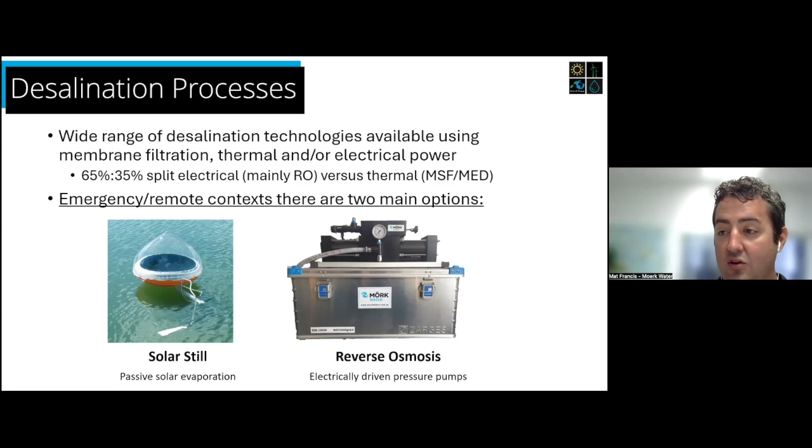When we look specifically at emergency or remote contexts, we generally see there are two main options. You've got a solar still, where essentially you put seawater into a plastic dome. The heat of the sun evaporates drinking water off the seawater, which condenses on the outside of the dome, and you can collect that to drink. And then there's reverse osmosis, which I will get into in more detail.

Reverse osmosis works as actually quite a simple process. In the forward osmosis process, you have clean water moving across the membrane into salty water - low salinity water moving across the membrane to high salinity water. This movement induces a pressure, a head of pressure as the water column rises. This is the osmotic pressure. If you reverse this process by overcoming that osmotic pressure, pushing down on the side of the salty water, you'll actually force clean water back through the membrane. That's all reverse osmosis is - providing a higher hydraulic pressure through electrical pumps to force water back across the membrane.

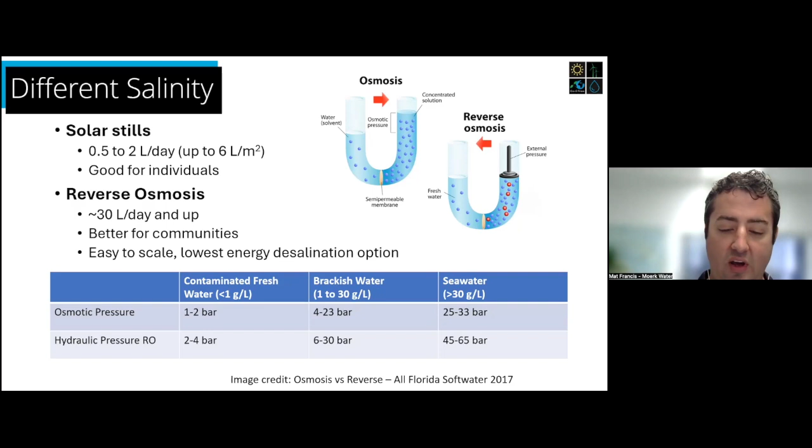When we're picking between solar stills or reverse osmosis, we generally see solar stills as very much a personal use device in emergency situations. These are a great thing to have on a boat in case your water maker breaks down. It's pretty much limited to about 2 litres a day, so it's just survival drinking water. You can make bigger systems, but you're always going to be limited to about 6 litres per metre squared of evaporation area. So these are good units for individuals, maybe for a house, not much bigger. Reverse osmosis systems can produce 5 litres a day, but generally when you're talking economical benefits, they're going to start at about 30 litres a day. So they're much better for a few households, up to communities, up to municipal scale. Generally when we're picking an option, it's going to start with how many people do we need to serve.

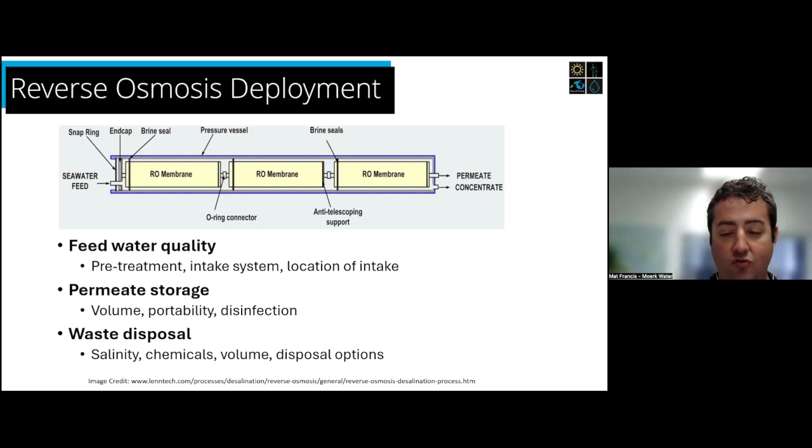Next I'm just going to quickly talk about the deployment of reverse osmosis, regardless of context - municipal plants, small remote plants, emergency plants. The process itself is fairly simple. We feed pressurized seawater across these membranes, and you produce 2 streams: your potable water and a waste stream. So the things you need to consider are: where are you getting your pressurized seawater from? Does it need pre-treatment? Where are you sucking it from? How are you getting that pressure involved? Then you've got to think of the 2 product streams - how are you storing your product? Are you going to then distribute it? Are you going to disinfect it? And for your waste stream, how are you going to get rid of this stream? Do you need to consider the salinity of the stream or the volume of the stream? So that's the process itself.

You also need to think of the supporting infrastructure around the reverse osmosis system. Reverse osmosis systems use a lot of energy - they are the most energy intensive of the water treatment methods that are commonly used. Generally for seawater reverse osmosis, you need between 3 and 5 kilowatt hours for every 1,000 litres you produce, which is a lot of energy compared to traditional water treatment methods. And the smaller scale these systems get, as you move towards emergency systems, you generally need more and more energy, because small high pressure pumps are not as efficient as big high pressure pumps. You've got to use more energy.

So that's just the power. You also need to consider your maintenance requirements - how are you going to maintain the system? And again, this is regardless of whether you're talking municipal, remote or emergency. How are you going to train your maintenance staff and operational staff to operate these units? Lastly, you need to consider how are you getting this unit to site, how are you installing it, and how are you going to house the unit. It's all fairly simple stuff.

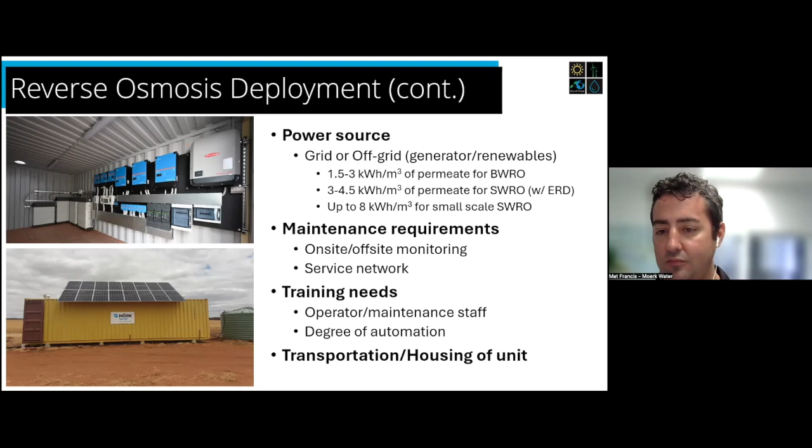When we look at the emergency context specifically, this does change slightly. For the feed water system, generally we're talking an ocean intake, seawater reverse osmosis. And you're going to have to be thinking, if it's in the wake of a natural disaster, you might have increased sediment load, increased bacterial load, you might also have fuel spills or something you need to consider on your pre-treatment system. Membranes are very sensitive, and you need to carefully consider what you're going to be putting across the membrane.

For the water you're going to produce, how are you going to distribute it? If it's an emergency situation, are people just going to be coming up with their containers to fill? Are you going to be putting it in temporary bladders, or are there storage tanks on site you can use? And then again, the reject - how are you going to be getting rid of this concentrate we're producing? Ocean discharge is generally best for seawater reverse osmosis, but there are salinity limits. This determines how much water you can pull out of the seawater you're treating, because if you pull too much water out, you're going to have a very salty waste stream you need to deal with, and that can cause real issues when you try to mix it back into the ocean.

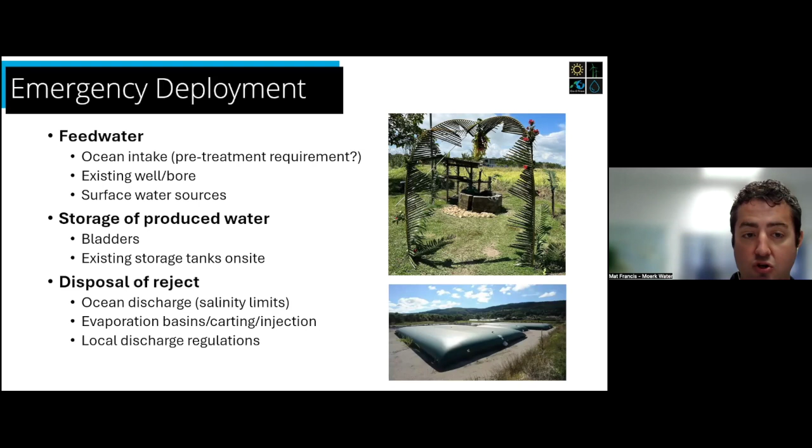In terms of power, for small portable emergency desalination systems, you can use renewables. For example, we have a 30 litre an hour emergency unit that requires 4 foldable solar panels - quite small, portable panels. As you get up in scale though, because of the power demand, you can't really use renewables to power these systems. So if your local grid's down, you're going to probably have to bring a generator on site with you to give you the power you need. Then you've got all the things around having to bring fuel with you, whether petrol or diesel, and supporting the infrastructure of that generator as well as the water treatment system.

If you're running these systems at high recovery, you're probably going to need some chemicals on site as well. So you have to make sure your dosing system's working fine and that you also have a source of that chemical. And then transportation - the more and more we add to these systems, so we've got a power system, chemicals, the water treatment system itself, all of that needs to be transported to site. Because if any one of those factors isn't transported to site, the system's not going to work.

And then around all of this is your operation and maintenance training. You're having to make sure that your operator knows what to do, how to make sure he or she is using the feed system correctly, producing the product water, producing the reject stream, and dealing with that correctly.

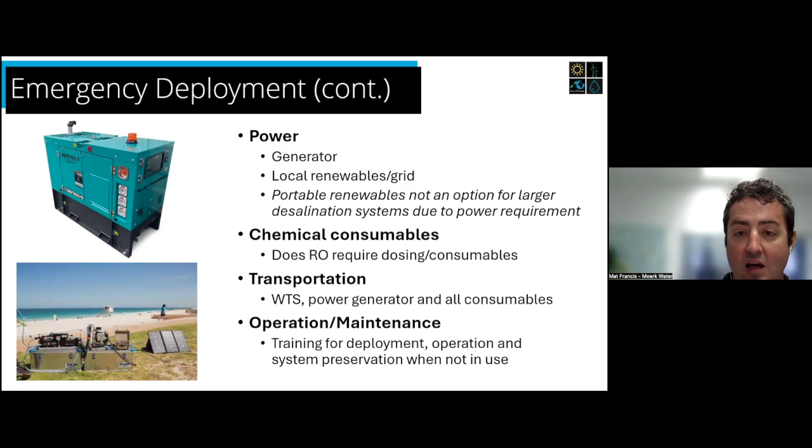And then we get to the big difference for emergency systems, which is storage. Emergency systems differ from remote or municipal systems in that they're not used all the time. Reverse osmosis systems love to be used day in, day out, and are really good for providing a base load supply of water. If you do need to pack down a reverse osmosis system, the best thing you can do is drain the entire system, pull the membrane out, and store it in a specialty chemical called sodium metabisulfite. Essentially you soak it in a 1% solution for an hour, drain it, and then seal it away from air. That should preserve that membrane for 3 months.

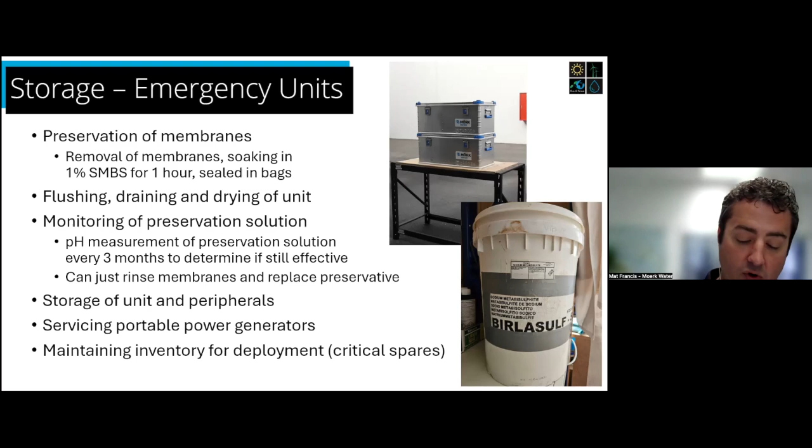If you need it stored for longer, generally you're going to have to keep an eye on the pH of that storage solution, and potentially you might need to give it another rinse, another preservation to make sure your membrane's ready for when you need to deploy the unit. You're also going to need to store the unit and make sure you don't lose any of the bits. We've had that happen in the past where people have actually lost the membrane for the reverse osmosis unit, which wasn't great when they got to site and wanted to use it. And if you're having to use portable power generators, if you're unable to use portable renewable energy, you're going to have to service those generators to make sure they're going to work when you deploy them in field.

I did want to also touch on training, because training is such an important part for emergency deployment. What we find is that the training required to support an emergency unit is actually more than what we see for training for a remote unit.

So training for remote units, generally it's just day in, day out operation. This system works all the time. If you're talking about an emergency unit, you're not just talking about operation, you're also talking about maintenance, storage, and all the inventory plans around that. So what we've also found is that you need comprehensive asset maintenance plans in place, and you need refresher training. If you're only using this system once a year to get you through a dry season, you need to make sure you're ready to deploy, and you can't be like, as the emergency hits, 'oh, how do I use that reverse osmosis system sitting on the shelf?'

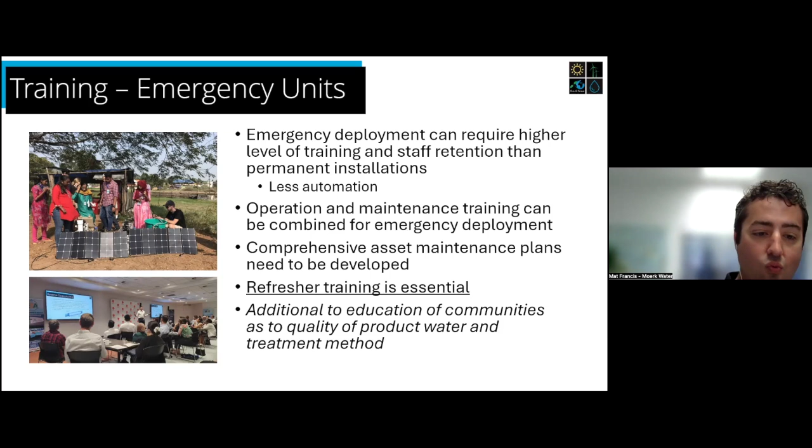This all needs to be done in addition to educating the community as to where this water is coming from, to make sure there's no issues around the actual deployment of the asset.

For my last slide, I did just want to touch on how remote installations differ from emergency deployment, just to show how a system running all the time, even if it's in a remote place, will differ from this emergency deployment we've been talking about.

So if you have a remote installation, generally it's going to be better to produce your energy locally, whether that's renewables or an on-site generator that at least doesn't have to be deployed. And as I alluded to before, training is actually better separated into an operation module and then a maintenance or servicing module. So daily operations happen on site and don't need to be done to the same degree that service or maintenance training will have to be done.

Transport and long-term storage, obviously not required because the system is on site for remote installation, and you're going to have permanent feed and storage tanks on site to deliver all of the infrastructure around the system.

So that's all I really wanted to touch on. Happy to answer any questions around this, and I'll hand over to our next speaker.

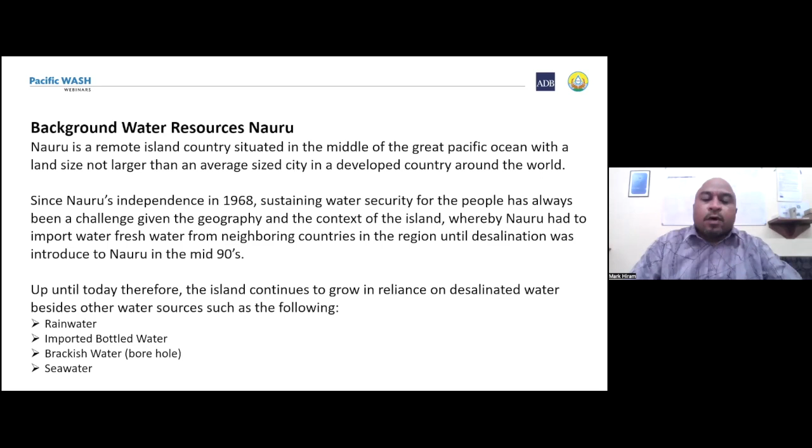So this is a bit of history, evolution of our desalination processes. During 1993, we had the first desalination plant installed. It's a thermal desal plant, and it went on for many years, until we had the first reverse osmosis, containerized reverse osmosis, as part of an emergency response at the time when Nauru experienced economic collapse.

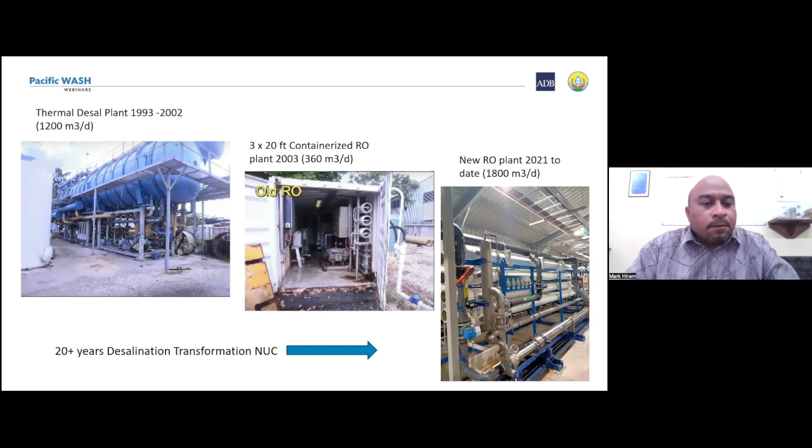So we had to import those containerized RO units. Over the span of 20-plus years of desalination evolution, there's been a lot of adaptation and technical support for our people to understand the processes and the systems. By 2021, we received the new RO plant, the biggest one, which can produce 1,800 cubes per day. So this is a bit of history of Nauru in terms of desalination.

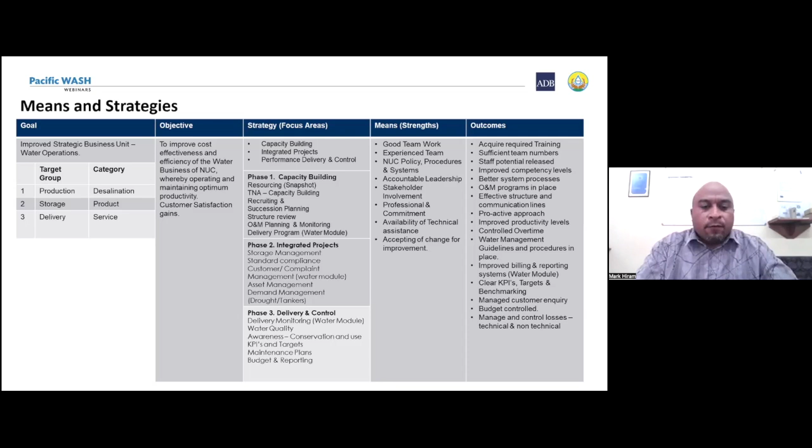So in order for us to move this forward, we needed to identify our strengths, and take a snapshot of ourselves and what we need to do, to resource ourselves and take on those objectives. As you can see on the slide, on the right-hand side column, we have the expected outcomes we needed to achieve. Some of those points were being achieved, and some are still underway, and we continue to undertake all the effort needed with the means and strength that we have in order for us to improve and meet the targets.

So that's the water that's going to the RO for the RO process to take place. Most ROs nowadays have this pre-treatment process built into the RO. If you have a containerized RO, it's built in, it's in there. In larger plants, this is sort of separated, coming in a different train or skid rather than built into a container. So yeah, this is a basic process of pre-treatment.

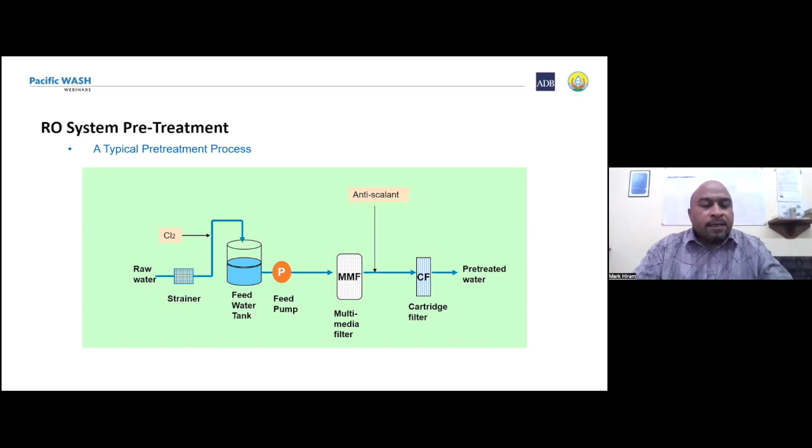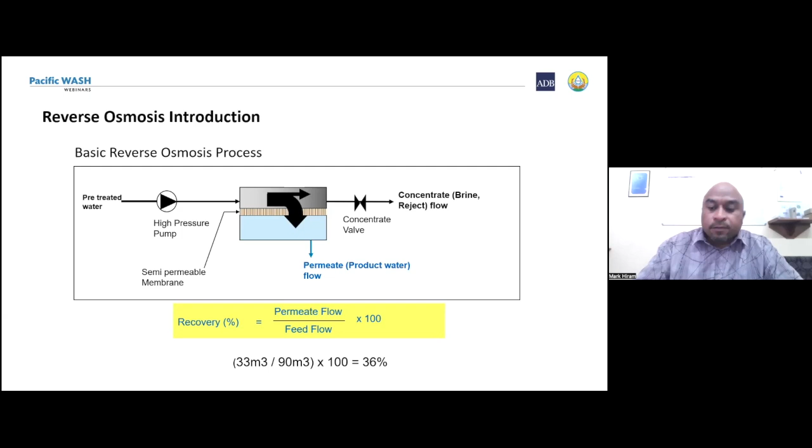However, as a technician, it's important to understand how the system works, the different components, because when things start to fail, you know what to do, and even how to troubleshoot when there's a fault. It's important to understand the RO process itself.

You have to have a good maintenance plan, and you have to have a good team as well, and have good reporting and data collection as well.

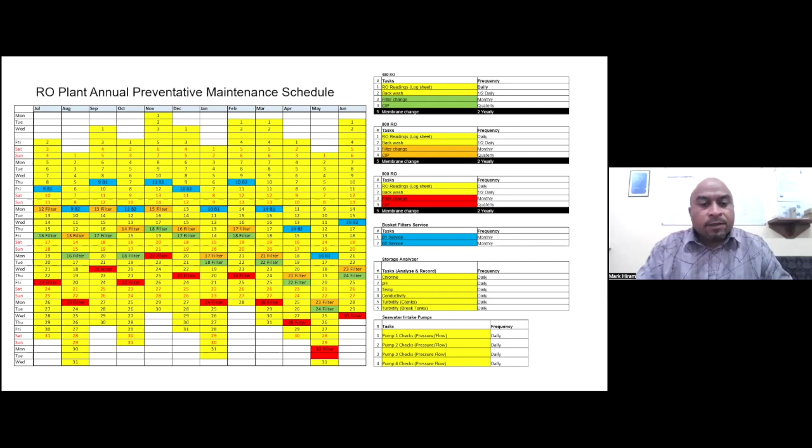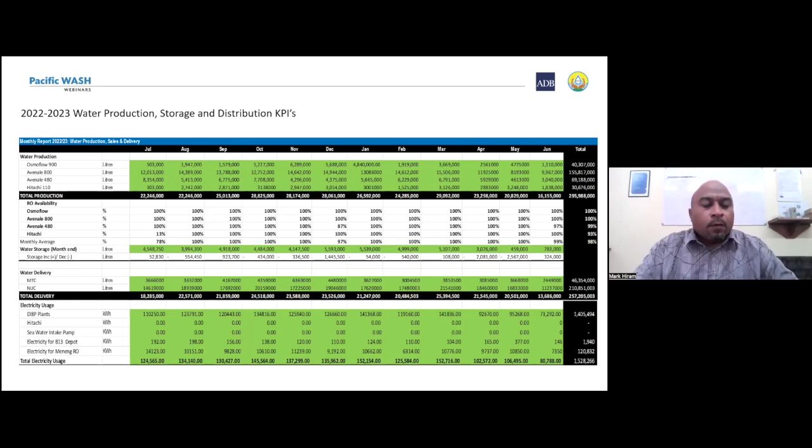In terms of capacity building, it's really important to have a good team, and it's really important to identify individuals who have that background with multi-skill, tradespeople with background in electrical, mechanical, plumbing, and all that. Anything that associates with the operation and maintenance of the RO, it's really good to have those kind of individuals.

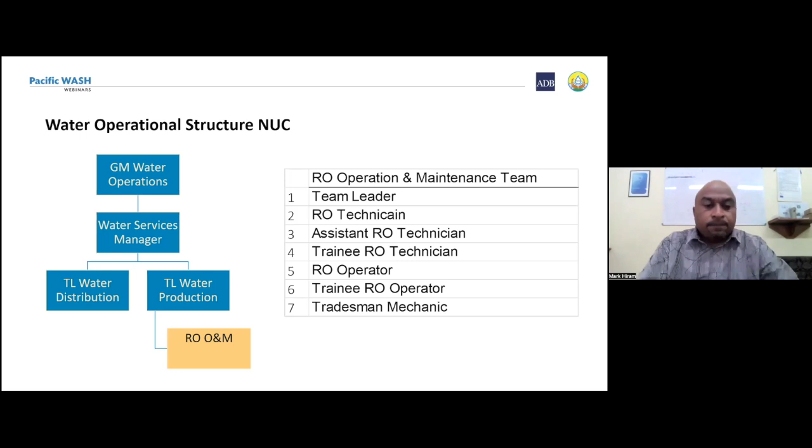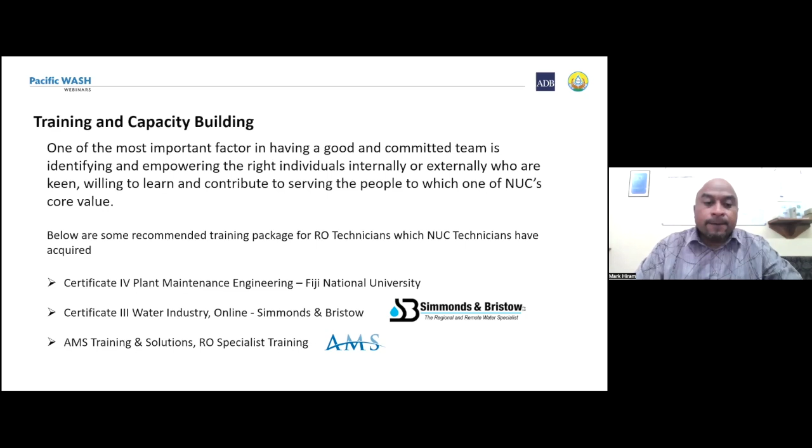And also we have the Certificate 3 in Water Industry that is done online, Simmonds & Bristow. My RO technician has done this, and it's very good. And also the AMS training solutions for RO specialist training.

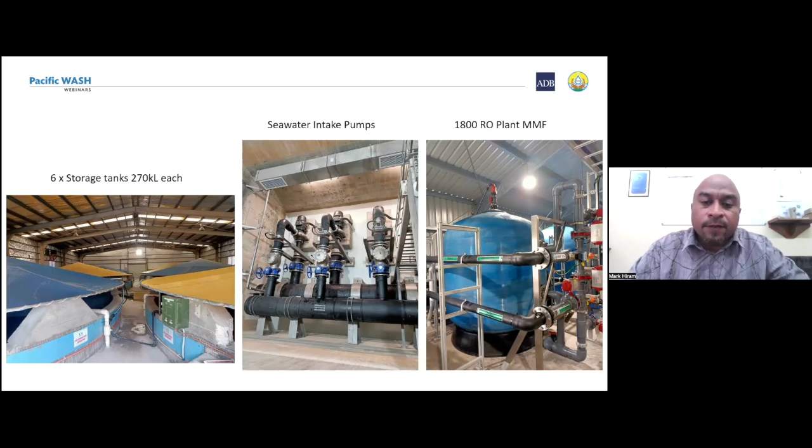Thank you so much, Mark. That was very useful. I think you're beginning to convince us how seawater reverse osmosis should be seen as a simple system, not that complicated. As you put it, it's a collection of pumps, pipes, filter membranes, something that could be easily operated. And I think that's what Matt is also telling us in terms of the emergency installation.

I'll be interested to gather a few of the questions provided in the chat box. I think there's one from Vili. Matt, you've initially responded to that, but the question is, if your source water is brackish, does the brine or rejected flow can that be used for other purposes such as agricultural use? Mark, there might be some experience also of reuse for your brine. Well, at the moment for us, it's just going out straight back to the ocean, and there's a study going on from government officials here in Nauru to see possibilities for utilizing that brine to make salt out of it.